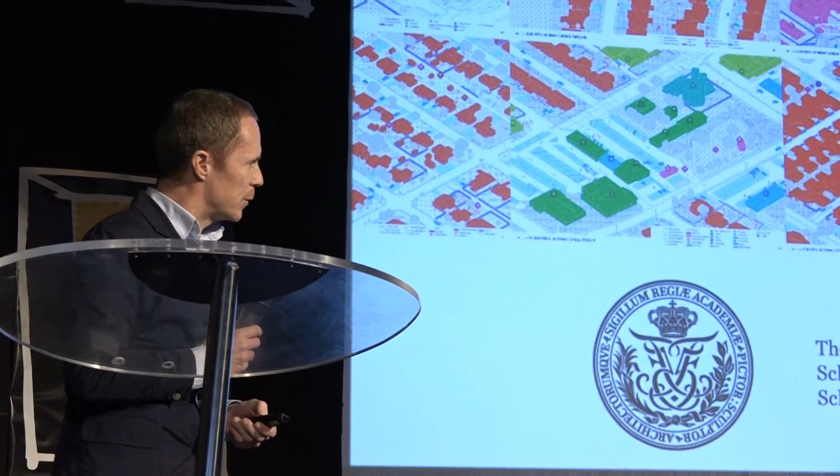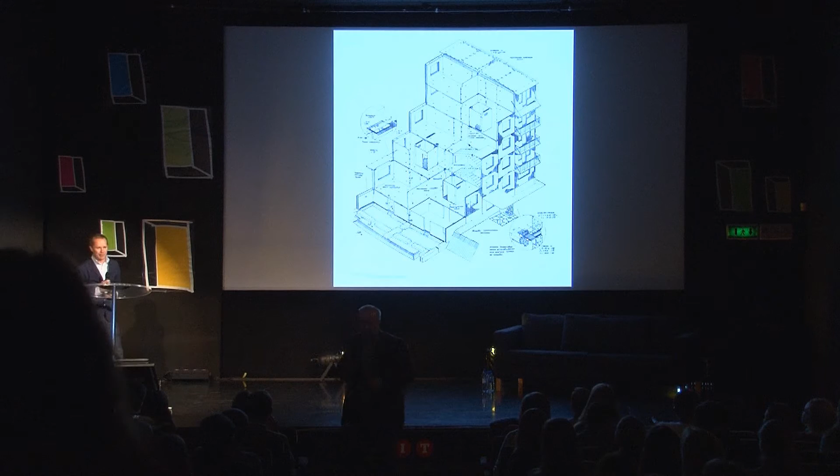So we spent actually a year looking into the modernist legacy of the machine city logics of prefabricated concrete construction. First, we spent half a year with students in the master's program, some of whom are going to talk about these projects later. We've been looking, first of all, in a Danish context at this idea of the machine city on the left-hand side, which represents a kind of counterpoint to the garden city notion.

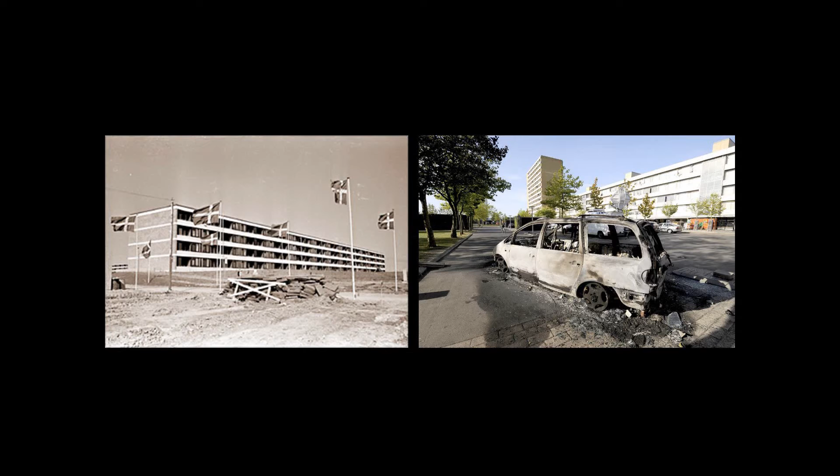A notion that in a Danish context started off with the idea of the workers' paradise, which has in recent years been associated in the press and media with many social problems, and also connected to the idea of spatial segregation in society—the notion that these modernist complexes represent emblems for spatial and social fragmentation in Danish society.

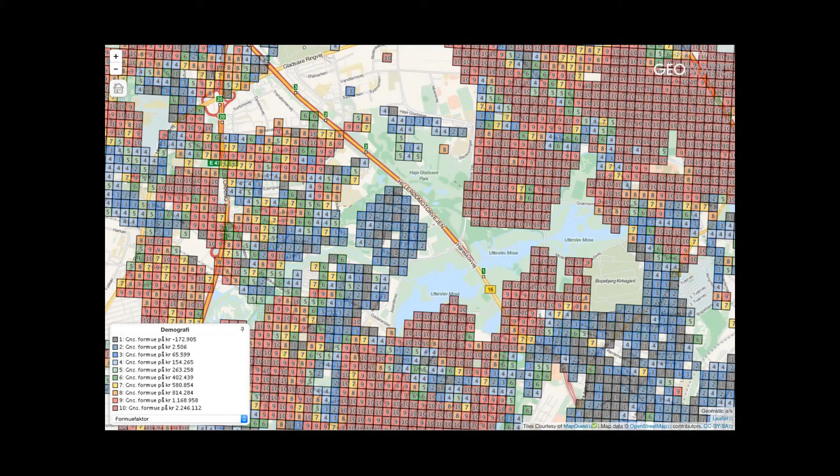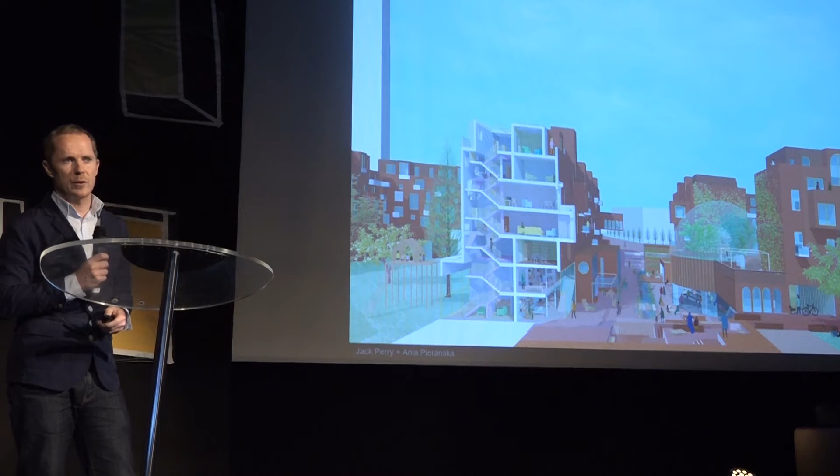We see, for example, here in this representation of income, an almost perfect mapping between the machine city, here at Tingbjerg, for example, and the garden city, mapping almost perfectly onto the representation of social problems. The students tried to question and critique the idea that this particular typology has been associated with all kinds of social ills.

They tried to actually look at exploring different spatial possibilities, both in restructuring the spaces of the interior, between public and private space, as well as semi-public space, and also exploring possibilities for open space between these areas.

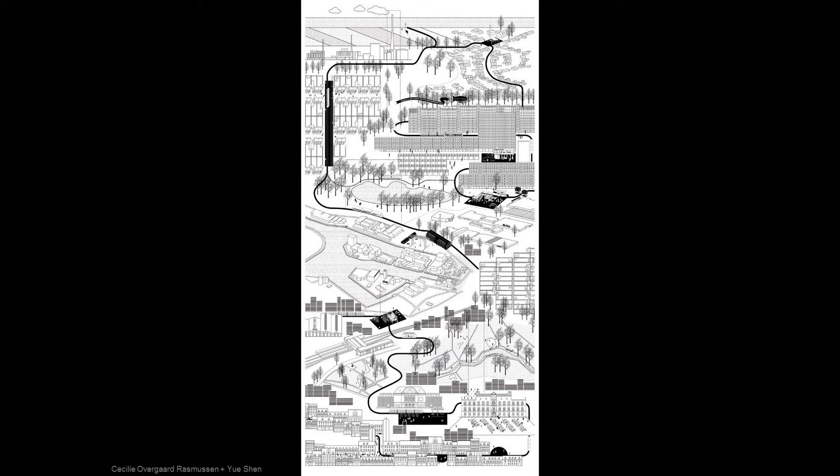Also looking at questions such as the stigmatization of these neighborhoods in relation to larger concepts of infrastructure in the city. In this case, a project questioning and looking at the idea of rerouting light rail infrastructure through these projects to try to change and reframe their position in the city and in larger society.

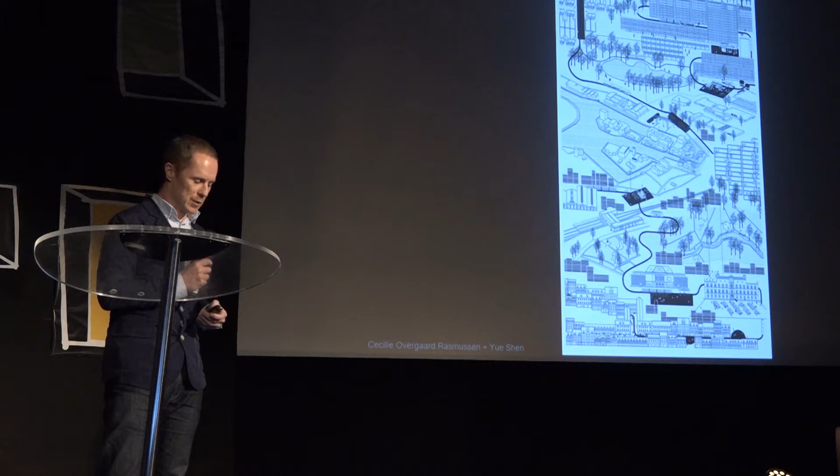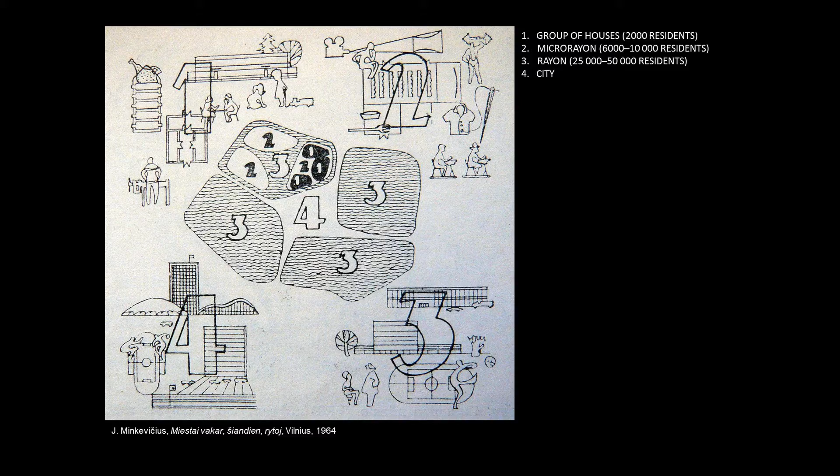So we were very interested not only in looking at these typologies in a Danish context, but also in a different context—in this case, the larger microrayon project, which is interesting in different ways, both in a generic sense, where we see generic conditions related to, for example, the sheer vast scale of production of prefabricated concrete construction.

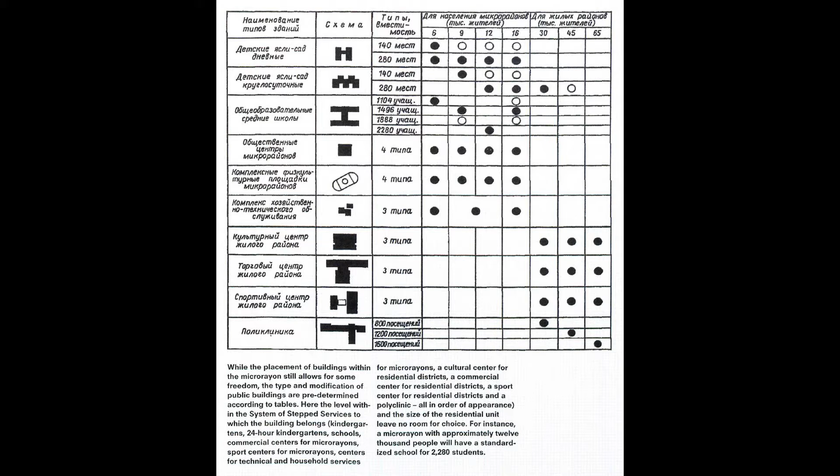This represents a kind of extraordinary and vast production of housing, which we see not only in locations such as St. Petersburg, but also in entirely different contexts such as Kabul, extraordinary both for its scale and its rationalization—the way the structuring and relationship at an urban scale as well as an architectural scale sets up relationships and rules that are highly rationalized and organized.

We see also at that scale, from an architectural and urban standpoint, many possibilities and potentials. One of these is related to work we've been doing with an American theorist who is less interested in the notion of the architect producing a single masterwork—a single museum or private house—but rather the possibility of looking at these large production systems of architecture and urbanism and seeing the possibility to hack into them and actually impose possible change through understanding those larger systems.

We're also interested in—I'll just run through some of these issues, then show some projects and would be interested to discuss them. The idea around the lifespan of these buildings, the notion of some kind of 50-year time frame for each system, which doesn't translate into a structural collapse of these buildings, but actually represents questions of different kinds of obsolescence—social obsolescence or functional obsolescence.

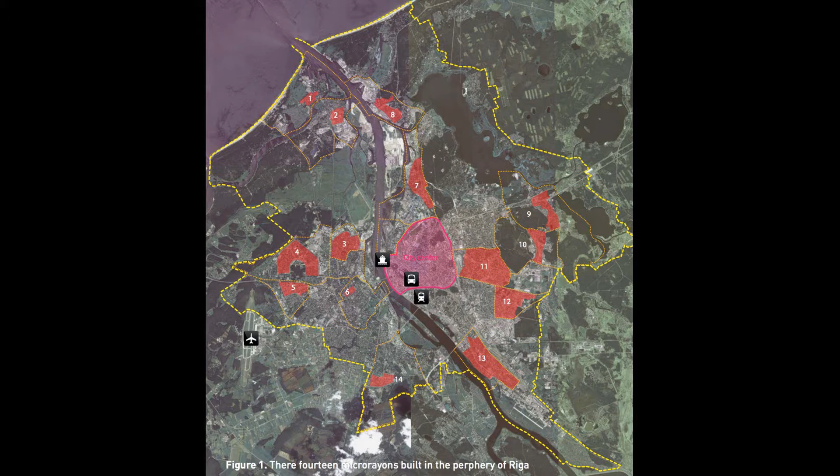Also interesting for us was the difference between the conditions we see in Denmark and what we see here, through the sheer scale, in the sense that this represents the majority of housing in this context. We simply don't see the same stigma attached to these housing complexes. It's very much the space of the everyday, which doesn't represent the same social stigma.

We also see a vast potential, as has been discussed already, of communal space in these settings. The idea here in the very first microrayon exhibition represents Khrushchev's dream of a highly intensified public space between these buildings. We see quite different realizations of public space framing, or common ground, which is obviously also under pressure from different interests.

What we did to try to understand the context better was to come to Riga, but also travel around Latvia and Estonia, where we tried with the students to meet with different people. We were very lucky to meet a number of experts, for example Jonas from the Urban Institute, and to have presentations from experts from the Technical University, Alexander's from the municipality, and so forth.

So in a way, we felt honored that we were able to try to understand some of the different dynamics taking place here, very much as humble outsiders, but with the intention of trying to understand the realities that are taking place here.

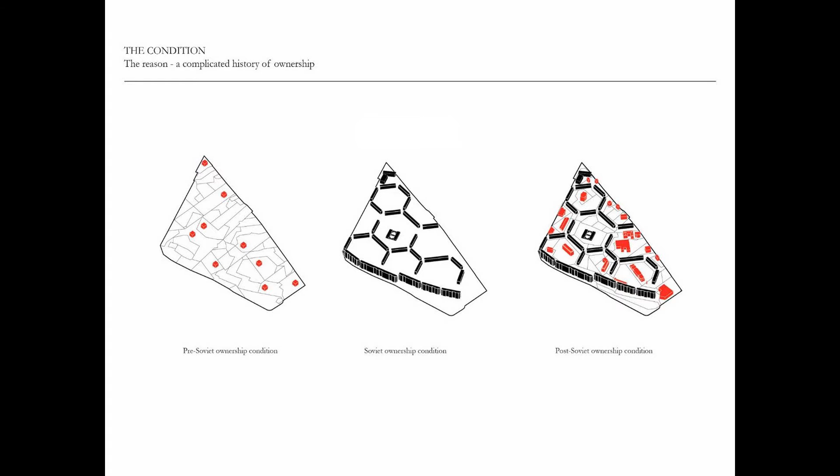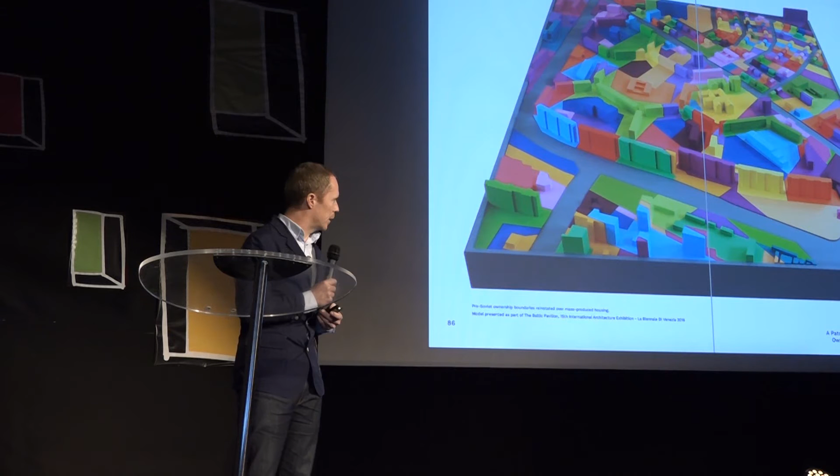Obviously there's the notion around discussions of depopulation dynamics, which are not even across the board. These dynamics have quite differentiated characteristics, where we see for example a relationship between depopulation and conditions of sprawl that you're all familiar with. There are also questions already discussed by Jorge around the complexity of ownership conditions, where we see this extraordinary fragmentation of land ownership and challenges in coordination of development.

We also see in the historical, cultural context, questions or what we could even call suspicion over any discussion of collective action or collective organization. We see also issues around complex ethnic and linguistic geographies, and pressures in development around issues like parking.

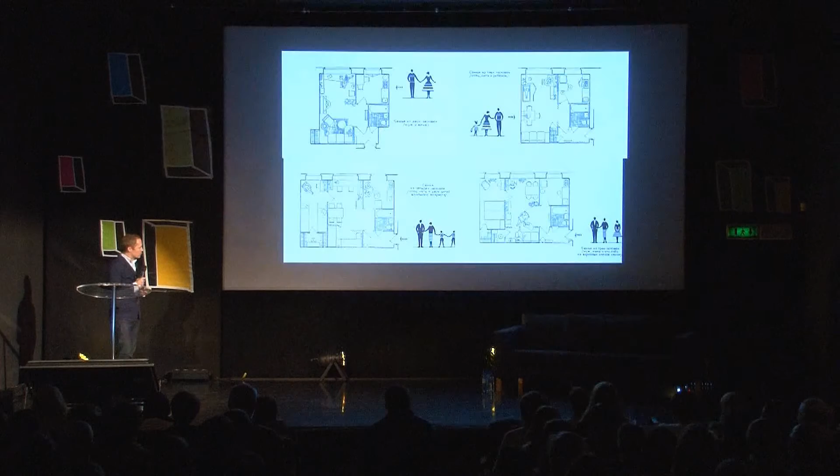There's also a notion of transformed desires around what residents actually want in terms of how they expect to live, which is quite different from the expectations and understandings of the interior life of apartments designed during this period, which we see playing out with quite limited choices of materiality and so forth.

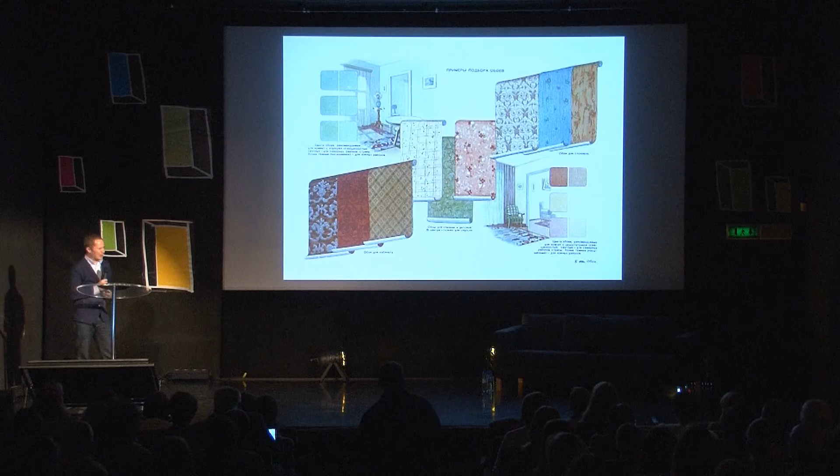Over the last 20 years, we see an extraordinary blossoming of individual expression and transformation, understanding the potential of the individual playing out through the interior of the apartment.

So as I mentioned, I'm going to show three to four projects. These projects are also shown at the town hall in the exhibition that opened yesterday. I'm going to go through them fairly quickly because I have 11 minutes left.

I'm going to show them in the sense that I think they represent not completed solutions, but let's understand them as provocations and possible visions that might suggest some humble possibilities around discussing what could be done in these areas.

The first project I'll talk about very briefly comes from Robert, Jakob and Carolina, which deals very much with this kind of fragmentation and diversity around the radical different nature of each of these parcels.

What the project tries to do, and I think the contribution of the project, is to attempt to come up with some system of classifying and understanding different characteristics that might allow a kind of planning logic to start to play out, based on different commonalities between these fragmented realities.

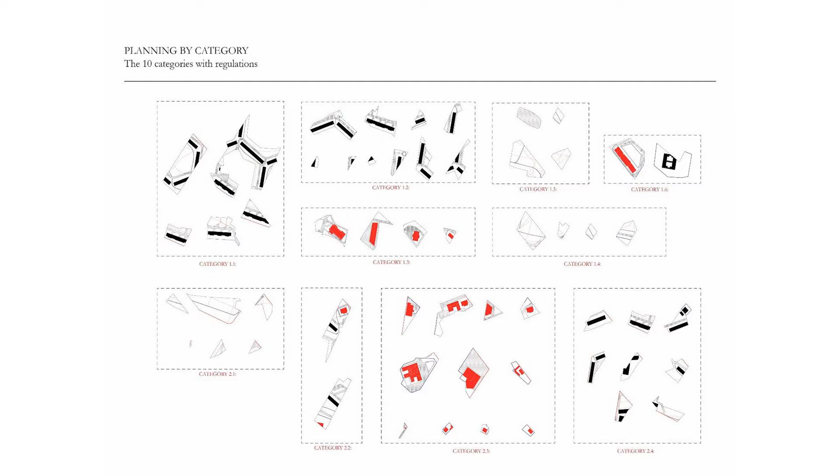They tried to explore how this might translate into some kind of framework for discussing how these different contexts could play out. They were interested in trying to see the different possible roles between the municipality, landowners, and residents, and the role the architect could play in proposing different outcomes.

For example, if the municipality were to ban or control surface parking, this might open up another opportunity for placing other realities on the ground surface.

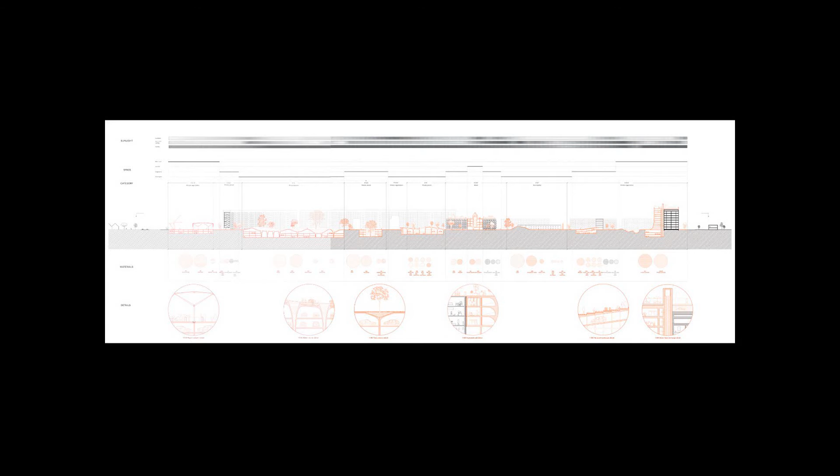The proposal, we discussed this in many ways, and the feeling was that it was somehow outscaled for the site in Purvciems. But the idea was that by placing parking underground, the possibility would be to invest in the ground surfaces, together with understanding the different constraints and requirements around qualities and characteristics such as climate, to develop logics for a kind of development that could live with, and actually flourish within, this kind of fragmentation logic.

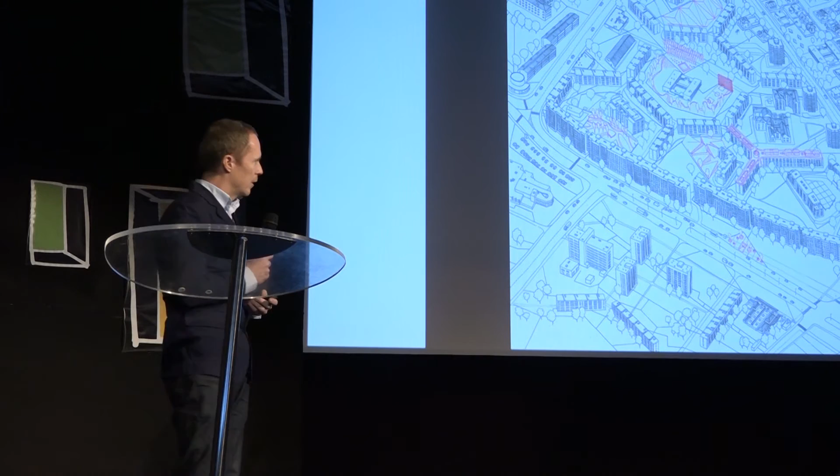The idea is that through understanding the different possibilities and parameters of these different plot types, one would be able to see different possible contributions to development in these areas. I keep moving quickly through these projects.

The next one comes from Asal, Daniel, and Natasha, which they call typological correction, which reacts to several different conditions. One of these is the question around contemporary desires for housing quality in terms of square meters, but also around different migration patterns which place different microrayons under different levels of pressure.

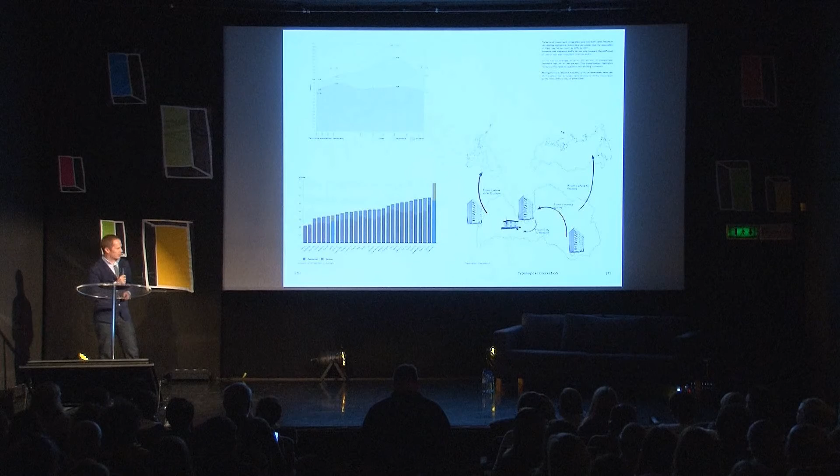From the idea of microrayons that are very desirable and have low vacancy rates, to other microrayons that are actually fairly empty, they also look at how different possibilities could emerge from understanding various shortcomings in the housing itself. In interviews with residents, they discuss, for example, limitation of storage, the inflexibility of spatial subdivision, as well as conditioning questions around climate and energy consumption in these areas.

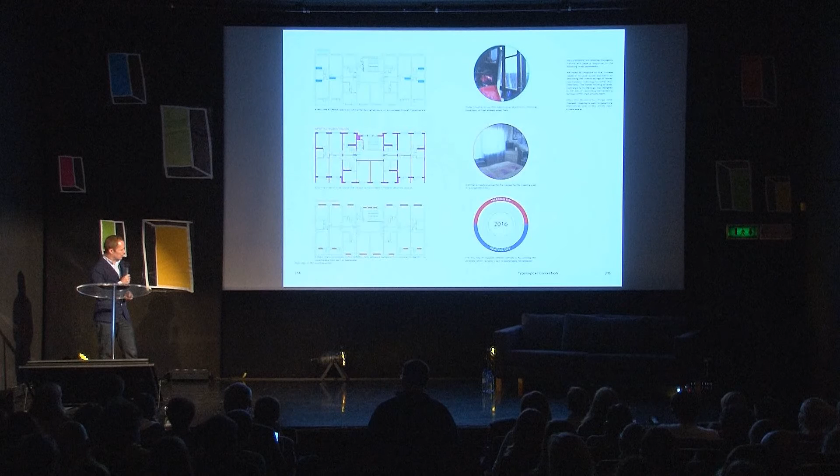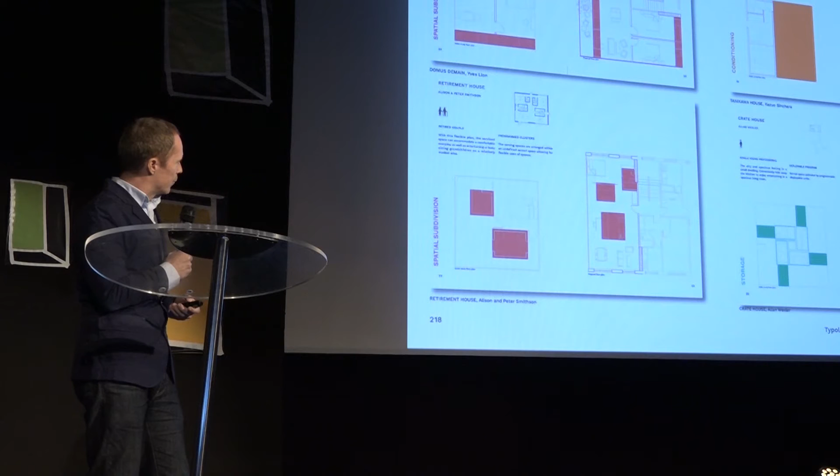They conducted an extensive study into a number of different housing examples where they tried to rethink potential layouts and organizations of housing interiors, exploring these themes between storage and, for example, air conditioning situations, and how different organizations could be possible. Through that they developed a series of tools that you see in the top right-hand corner.

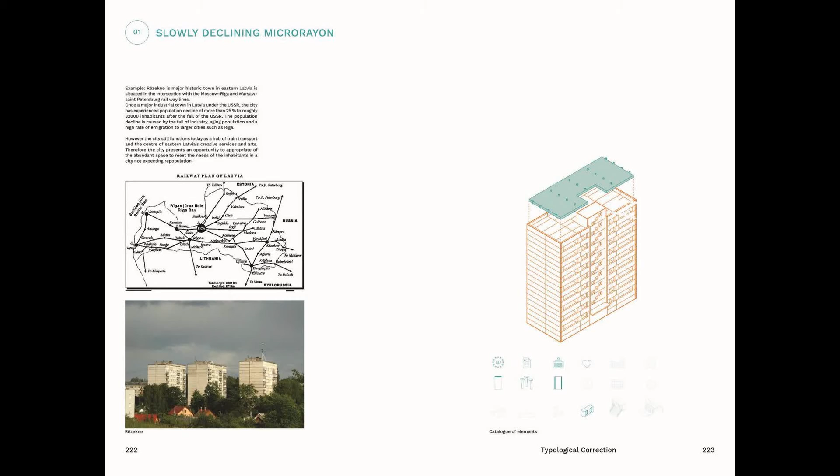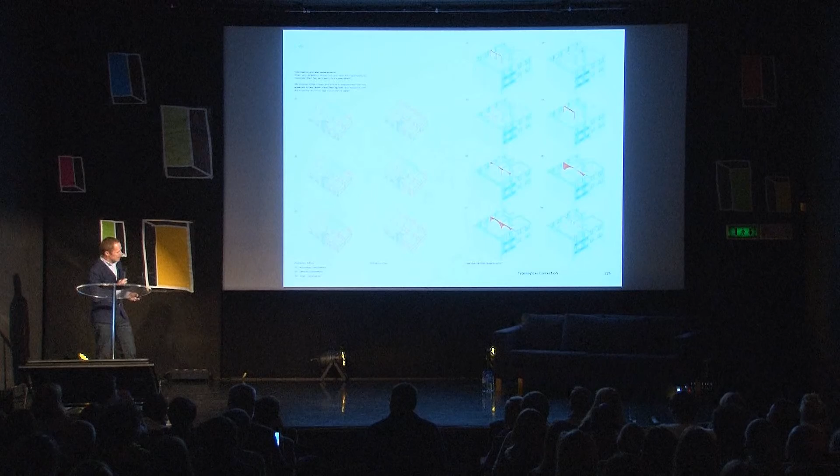They were interested in distinguishing between different conditions: the declining microrayon, the stable microrayon, and the desirable microrayon. The declining microrayon they saw as a site of great potential for expanding square meters per unit, describing a kind of horizontal or vertical colonization, where you see the expansion of units into adjacent units. They were also looking at standardization of different structural elements that could be placed in different contexts to allow for reorganizations of interiors.

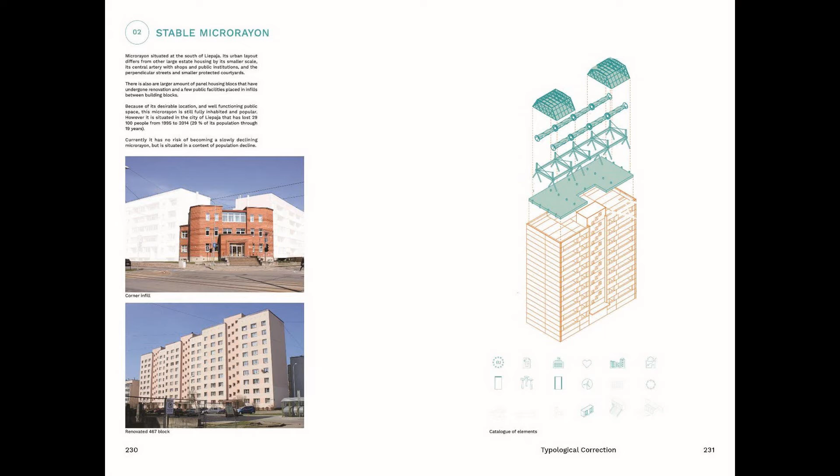Which they show here. The stable microrayon they saw as a possibility for exploring the potential for installation on the roof that could supply common space, and could also allow for energy production.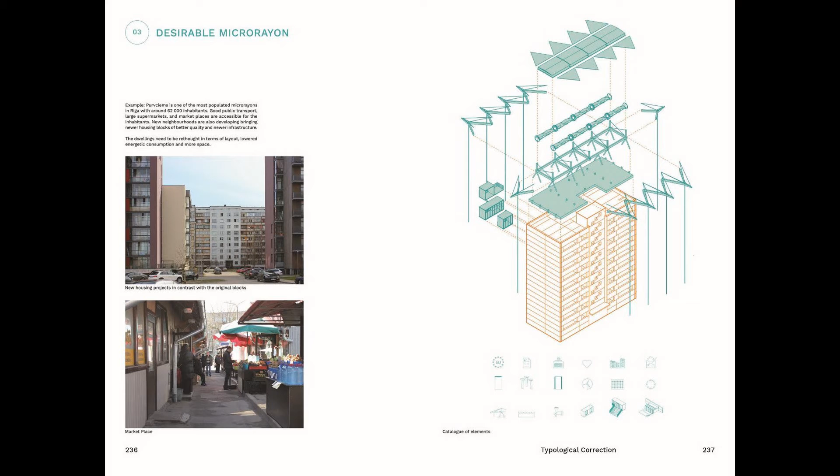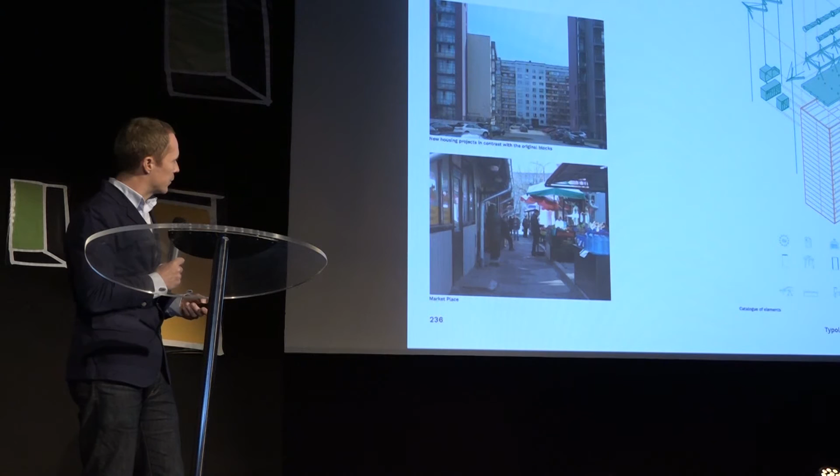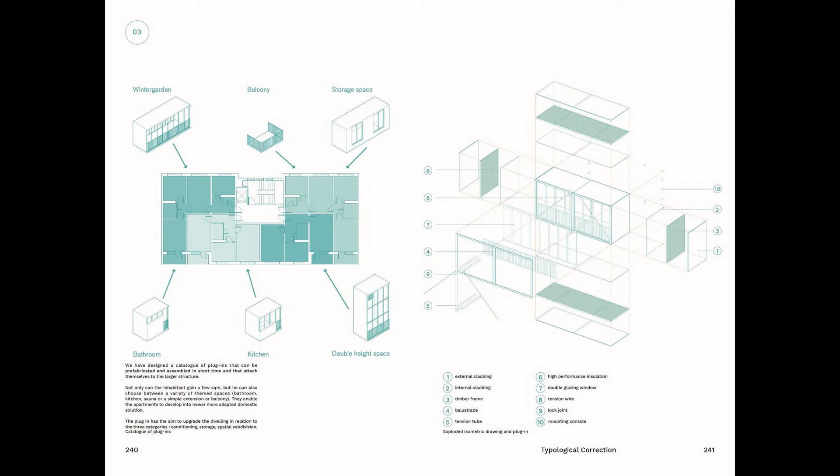The last example, perhaps the most detailed, was in situations like Riga itself, where you see large microrayon areas that are still attractive and well tenanted. Here they looked at different expansion strategies, combining this roof insulation logic with a hanging system that would allow for different types of expansion - plug-in devices that would let residents buy into these catalogs and transform their square meters, for example through standard bathroom or kitchen expansions built into this logic.

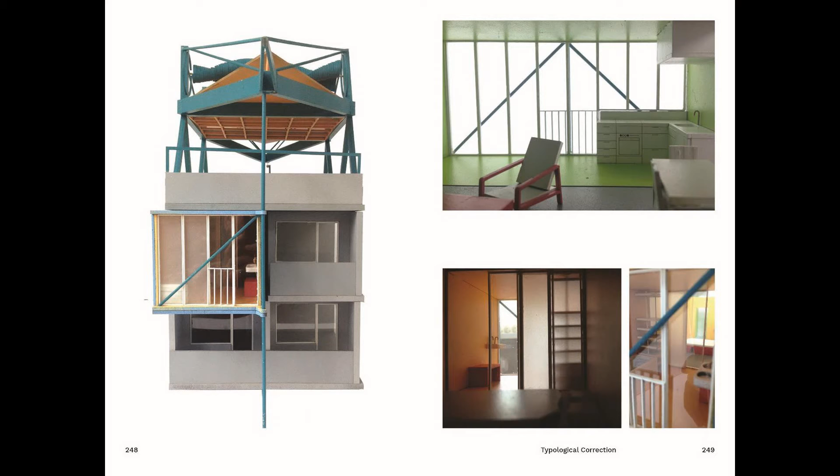So it was very much looking at a multiplication logic here, applying aspects that could be applied on the exteriors of these desirable contexts.

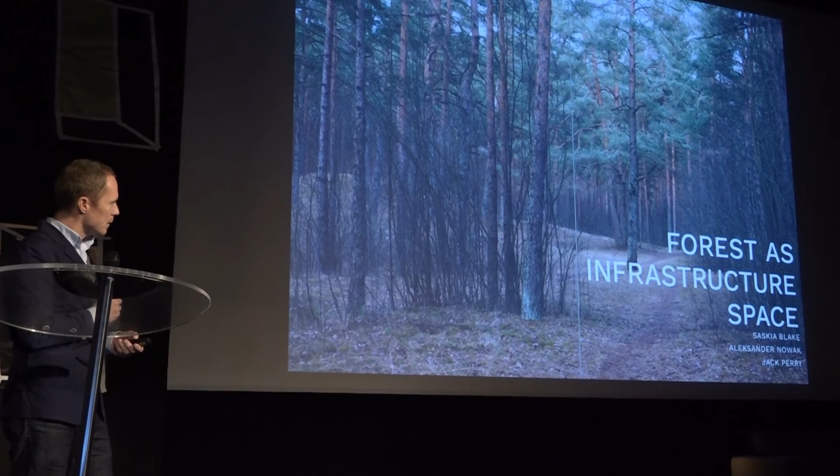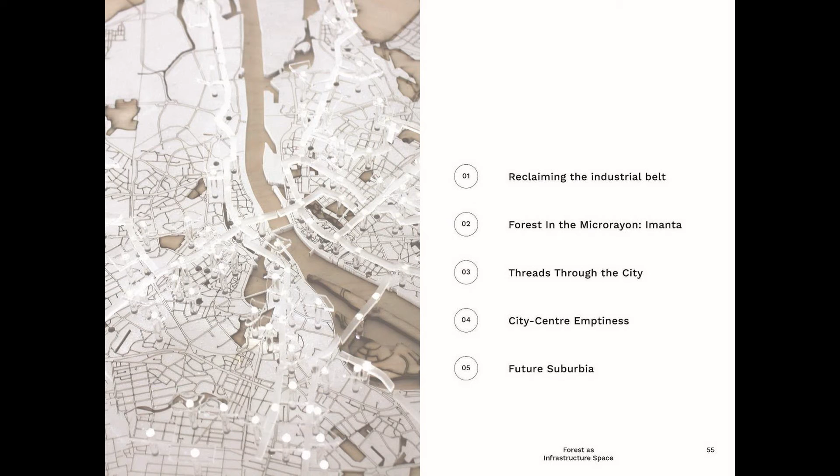The third project deals with various scales, including a very large scale, and was inspired by what many students perceived as an extraordinary landscape quality in the Latvian context - the Latvian forest. They delved into the role of the forest in Latvian popular culture, literature, and painting, and explored forest spaces, becoming increasingly interested in the use of forest as a technique that might become a planning device in relation to the idea of expansion and sprawl in the city.

This worked at a number of different scales, which you can see in the next video, where they're exploring the role of forest as a kind of infrastructural space that could be used dynamically to react to depopulation and emptiness, but also becoming a logic of spatial and landscape coherency within the city, not only in the larger areas, but becoming a device.

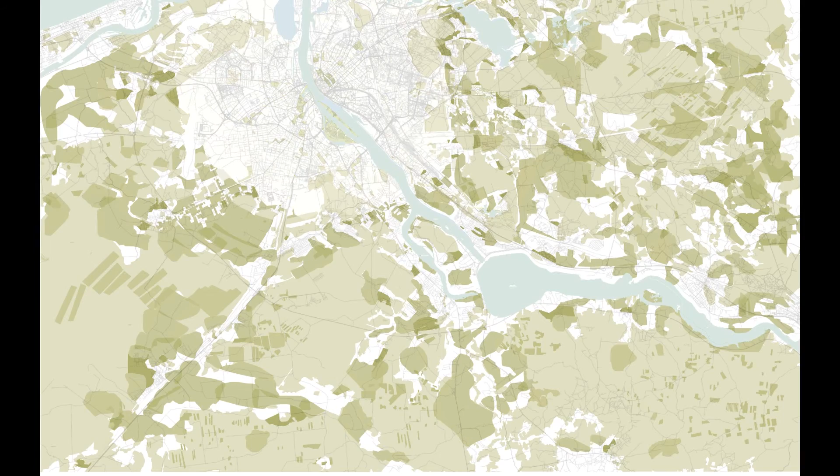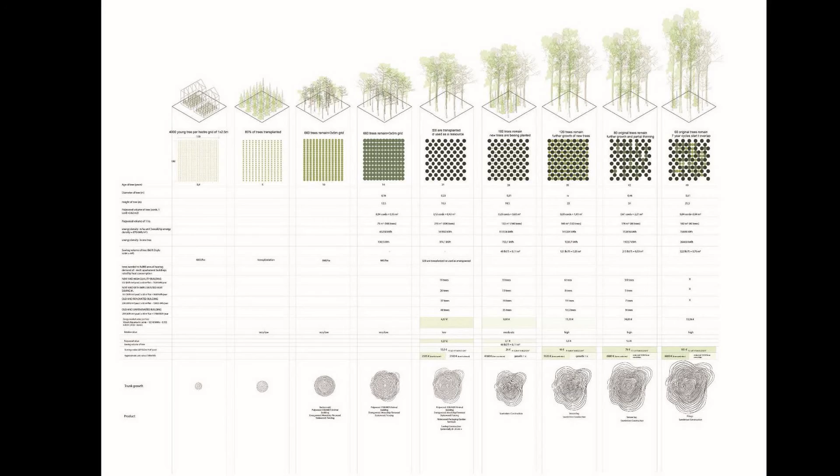Here you see on the bottom different possibilities around population increase or decline, which becomes a way of thinking of this as a kind of reactive planning system. There was thinking about how this would react over time, with different levels of forestry transforming over time, as well as different ideas that would work at other scales.

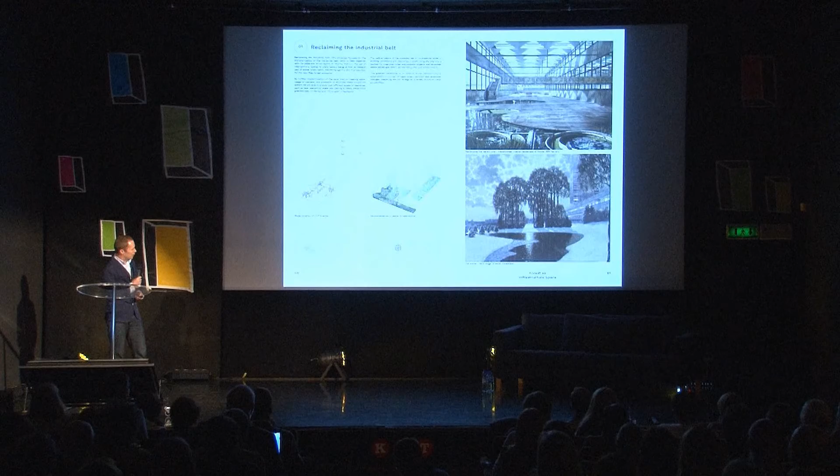The idea of the largely unused industrial areas around the microrayons, finding new possibilities of how these might relate - for example, in the work of Alexander, trying to find new forms of resource circuits, also around wood in this case.

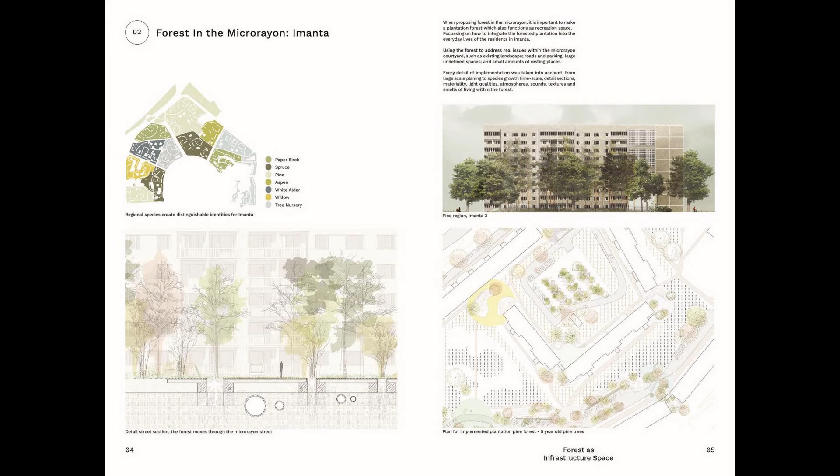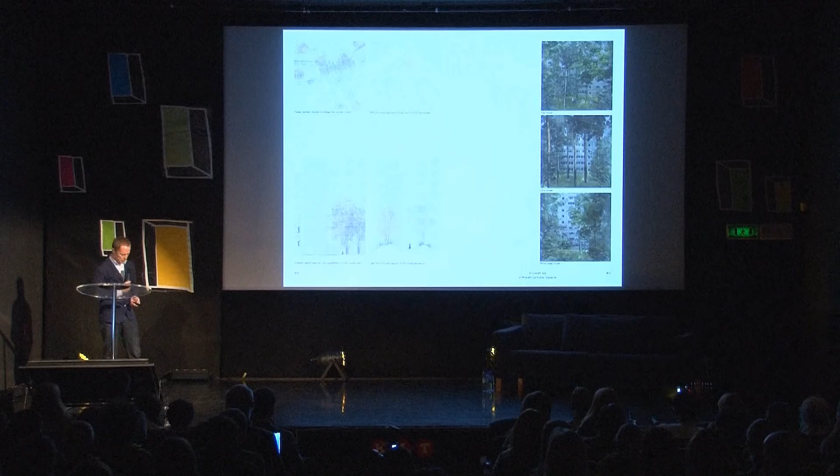They were looking also at how forestry could become a very strong landscape quality in defining the public space between various microrayon buildings, which we see here through the specification of different forest types, as well as different kinds of landscaping gestures that would start to better define the public spaces and try to make them more intimate, as we see in an image here.

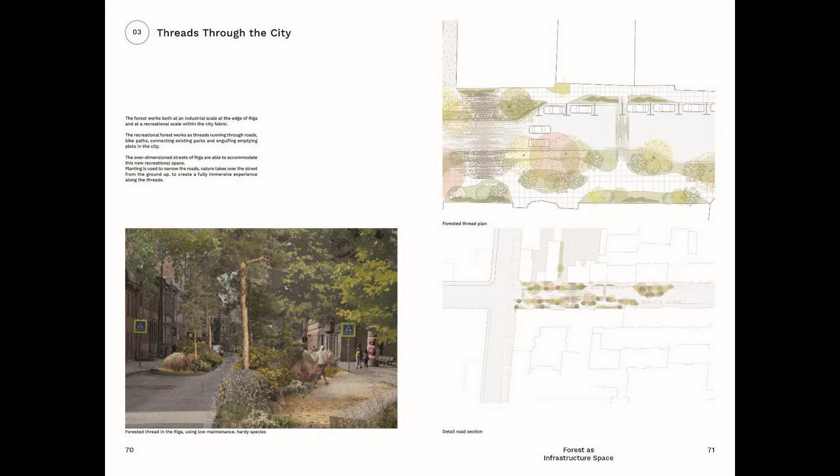As well as looking at how this could become a way of interacting in the inner city also, for example, if we just go back, in the idea of actually reorganizing street profiles and the role of landscape within the street, particularly where we see large numbers of empty buildings. That's playing out also in this context.

They also proposed this kind of idea of what they call threads through the city, representing coherent landscapes that would move through the spaces.

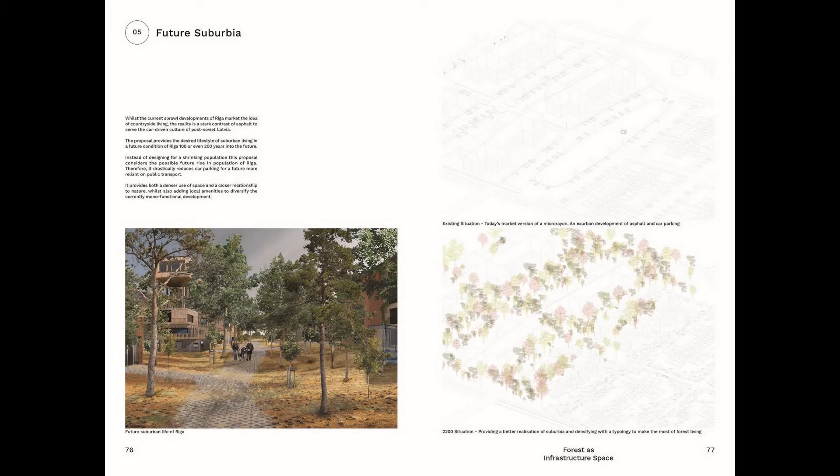They also proposed how this would become a tool or instrument in the suburban or peri-urban areas around Riga, where one would see a shift from a predominant logic around large parking spaces and an open landscape into a much more intensified landscape combining forest elements - a shift from this logic toward a different kind of atmosphere or quality.

So just to conclude, what we discussed intensively through this is this notion that the scale of the challenges around obsolescence suggests the sheer necessity for some form of coordinated or facilitated response. In this context, when one discusses the percentage of housing stock involved in microrayons, the urgency of these issues is such that one almost doesn't see the possibility of moving forward.

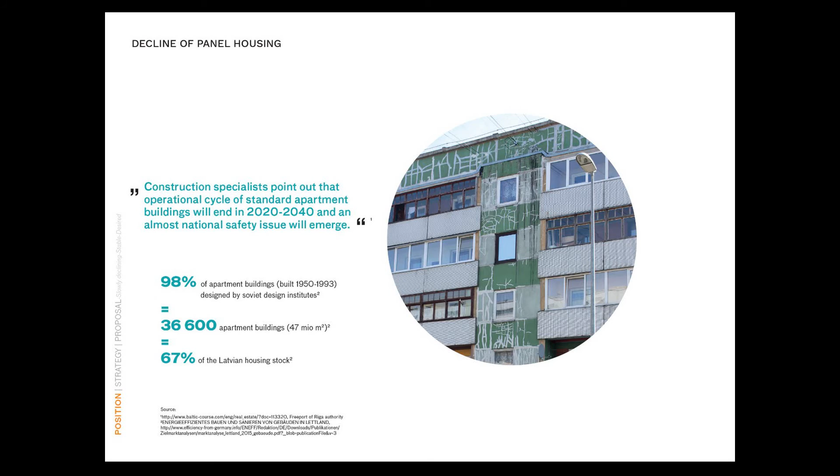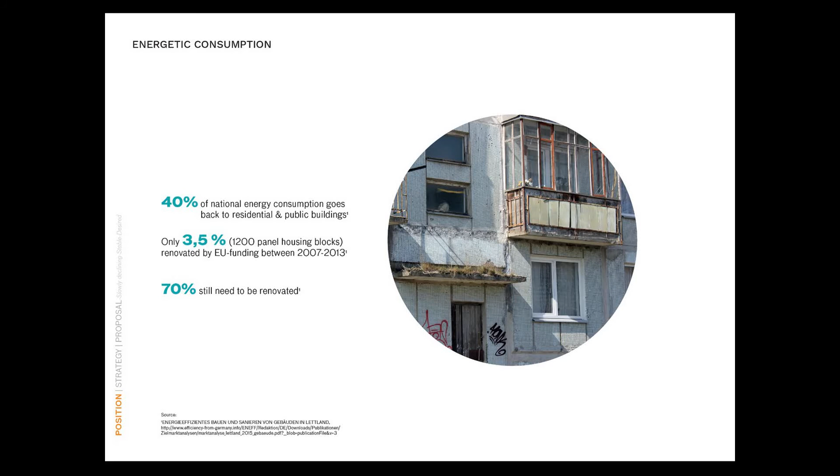Without some form of strong leadership, in the form of facilitation more than pure top-down decision-making. This was discussed not only around energy efficiency discussions, but also in the context of the typological correction project, and the sheer possibility of systems like this and their usage when one looks at the scale of this issue.

The last issue, which leads into a very short presentation of the last project, is the notion of not only bottom-up, but also the necessity, together with bottom-up, of developing top-down approaches. Obviously that's what's being discussed today, which I'm also very interested in, and very happy that that discussion is taking place here today.

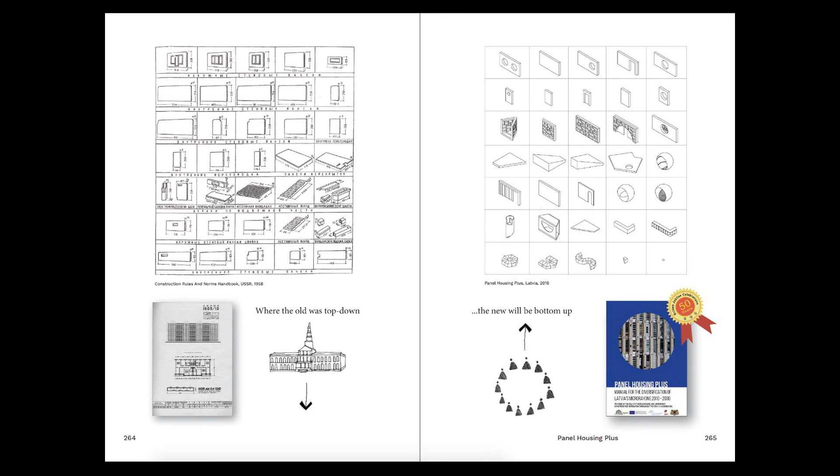Their manifesto argues for the use of multiplication, but dedicated not towards standardization, but towards embracing this reality of extraordinary diversity, both on the interior and, as we see, the emerging exteriors, through a new form of catalog, a new kind of system that becomes a facilitation device offering many possibilities. They studied different forms of catalogs, understood between prescriptive and unprescriptive, between top-down and bottom-up facilitating.

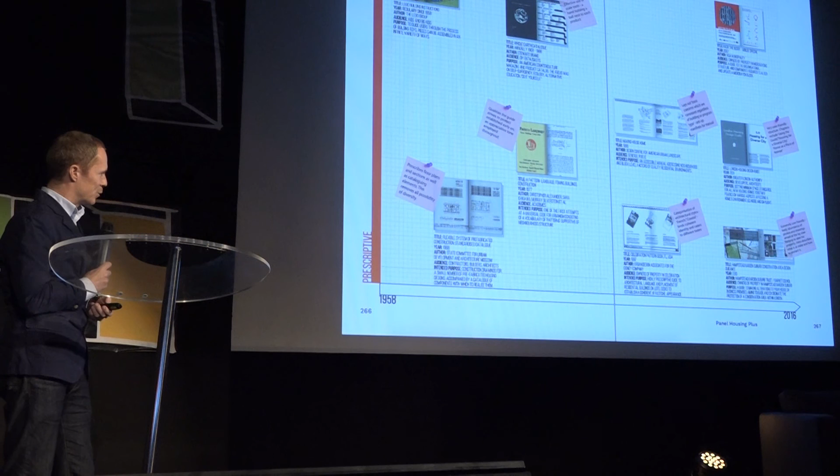I don't really have time to go into it because my time is up and the screen is flashing red, but I'll quickly flash through some slides which you can see more in the exhibition and videos, where one sees how they envision the role of the municipality, the responsibility of tenants and landowners, and the possibility to exploit what appears to be a very small representation of public institutions and infrastructure.

Such as libraries or clinics in the Mikrorajona areas. So the idea is that this would be an area or a way to even out the possibility of access to these kinds of public goods in the Mikrorajona areas, which are lacking.

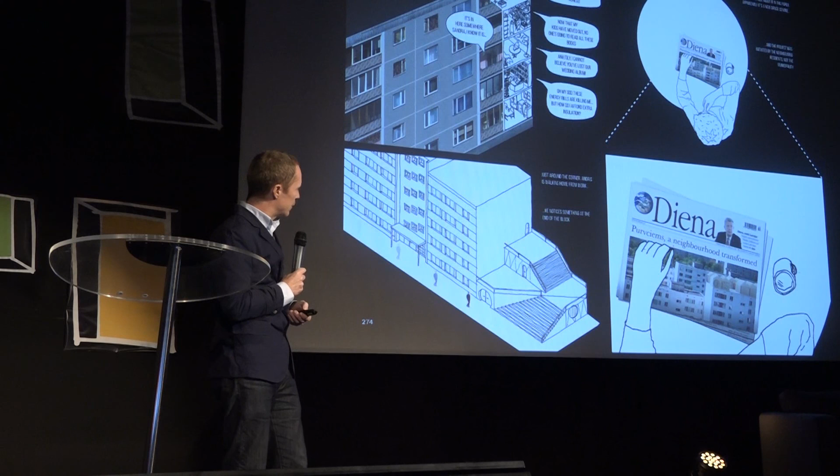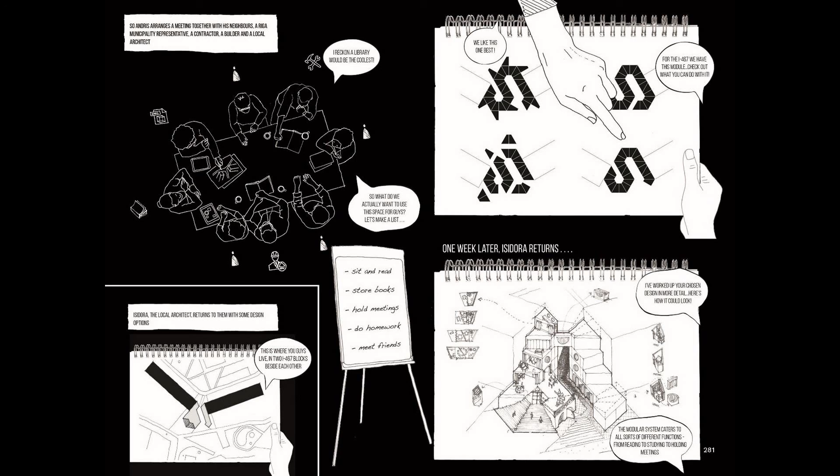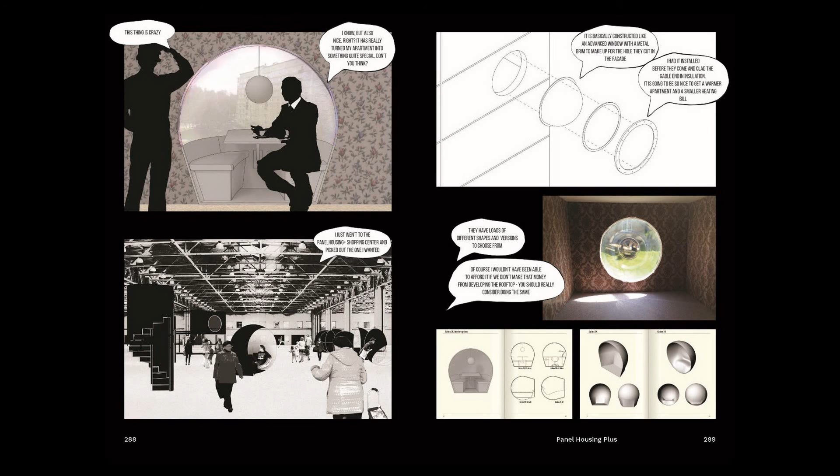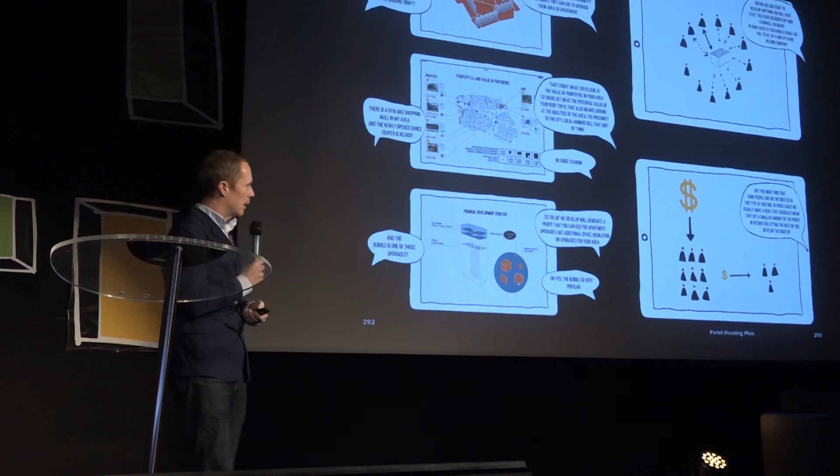So in this case, the presentation of different ways of structuring relationships that might start to become a way of developing ideas together between different stakeholders - for example, the unused space between buildings through the use of wood rather than concrete, and the multiplication potential of small elements such as the bubble window they developed in the end walls, through different relationships between funders, stakeholders, state actors, and so forth. So I'll finish there. Thank you.